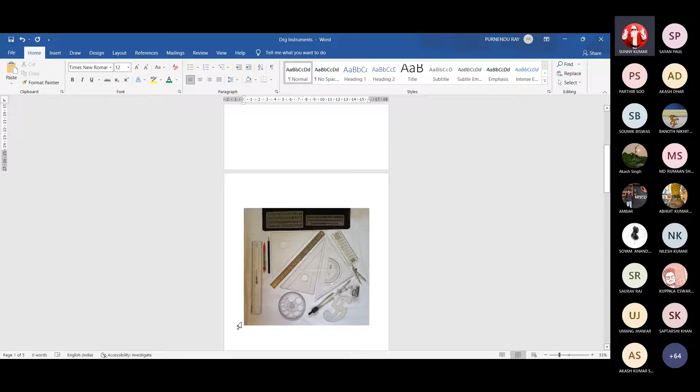Geometrical equipment. This is a scale, plastic ruler. This is another scale, steel. Now these two, I will discuss about these two.

Set square, set square, plastic, transparent. 45 degree, 45 degree, 90 degree, 60 degree, 30 degree, 60, 90 degree.

Now here you find two lines, this one and this one. Ready-made from the market, you will not get set squares with these lines. I made this. You take one permanent marker, place one scale matching the scale edge with the set square edge, and draw a line, suppose 1 inch or something like that.

Then, placing the scale beside these two set squares indicates the size of the set squares. This diagonal length is around 11 inches. Here also it is a little less, or 11 inches. So that is the size you can realize.

Now this is also another set square, 45 degree, 45 degree, but it is something different. There is some linear scale marking in millimeters, centimeters, 18 centimeters, and in millimeters also. And another part is built in.

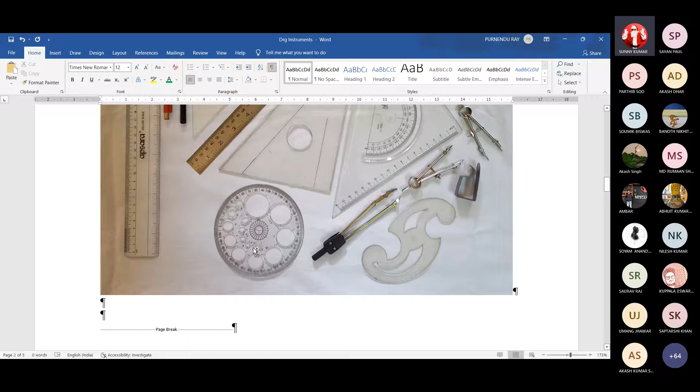Now there are some perforations, holes made bigger, this is the biggest, a little smaller, further smaller, etc. With these we can directly draw circles of their diameter: 4 millimeters, 5, 6, 7, 8, 9, 10, 11, 12.5, and 15 millimeter diameter circles. This saves some time.

You know these two pencils. This is the traditional pencil, and this is... what is the name? Mechanical pencil, lead pencil.

So the thing is, when you use the traditional pencil, you always have to mend this tip. But this mechanical pencil is ready-made with the same diameter, either 0.5 millimeter or 0.7 millimeter tip. Some of us prefer the traditional one, and many of us prefer this mechanical one.

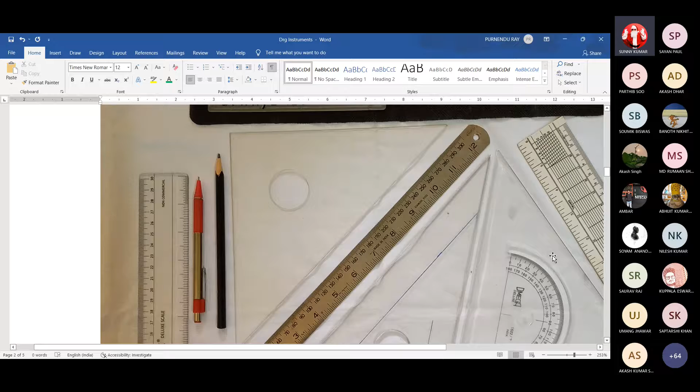Using this type of lettering stencil is very comfortable. This is 10 millimeter height letters and this is 6 millimeter height letters. Simply place the clutch pencil tip within the guide and move along it. This lettering stencil gives very uniform and nice looking letters.

But personally I prefer using only the 10 millimeter size when required, not the smaller dimensions, because it will kill your time. It's very difficult to manage all these things, drawing one letter, then bringing another letter. Suppose it's A, N, D - place A there, then bring N, etc. There are so many such things, and you do it gradually, but it takes time.

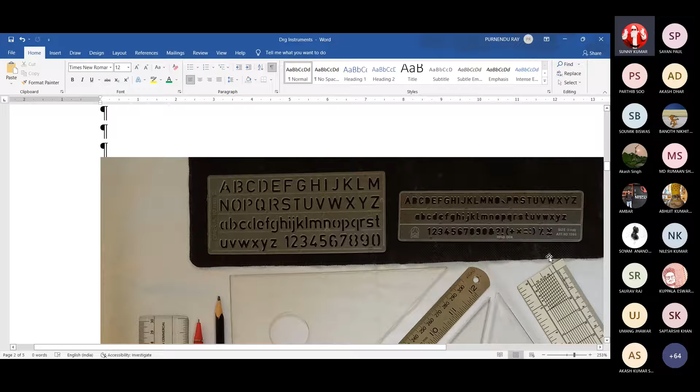So improve your skill of freehand lettering. It will be to your benefit.

Here you find one more thing. Can anybody tell me the name? French curve. This is only one sample; there are many French curves in the total set. This is approximately 6 inches or 5 inches in length, and it may be bigger also, with different styles of curves.

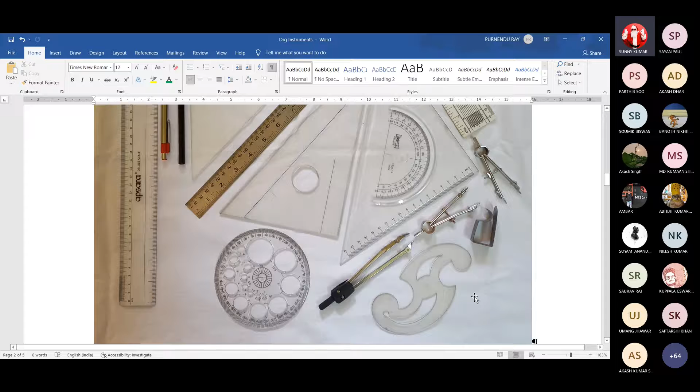If there are 5 or 6 points that need to be connected freehand to represent a graph, simply match the suitable portion of the different curves with those points, place the pencil tip beside the plastic curve, and draw a line in that way.

Now, you know this thing - what is this? This is called a board clip. On the drawing board you place the drawing sheet, and you fix that drawing sheet with this board clip.

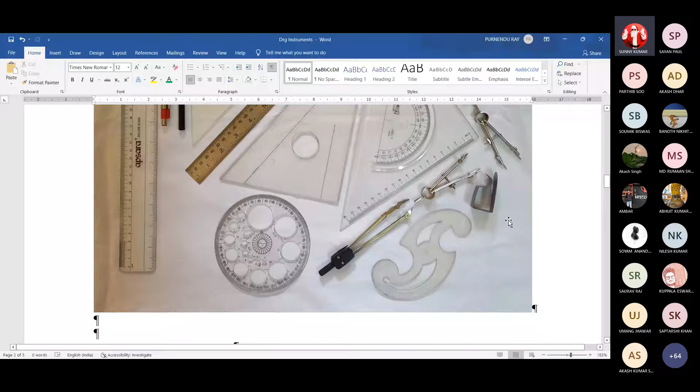Now some 2-3 more things are there. What is this one, the longer one? Divider? No, the longer version is not a divider, it is a compass. This tip is the pencil lead.

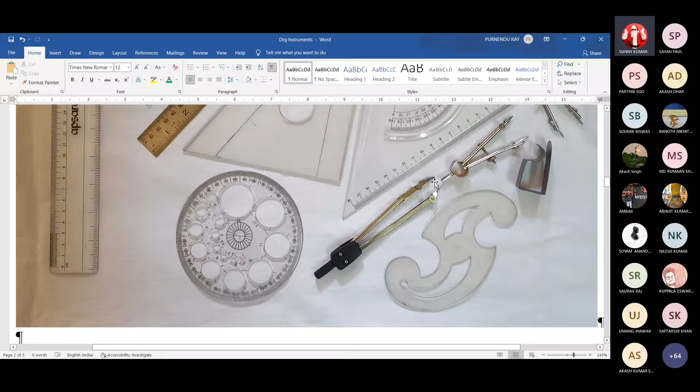Now, the divider is this one, the small divider. A longer version of the divider is also available, though not shown in this figure. This is the divider, with sharp needle ends. And here is the compass, a small compass - this is the center needle, and this is the line drawing pencil tip or lead. These leads are also available separately in the market, not just taken out from inside this pencil.

So now, what about this part? I'll try to make it a little bigger.

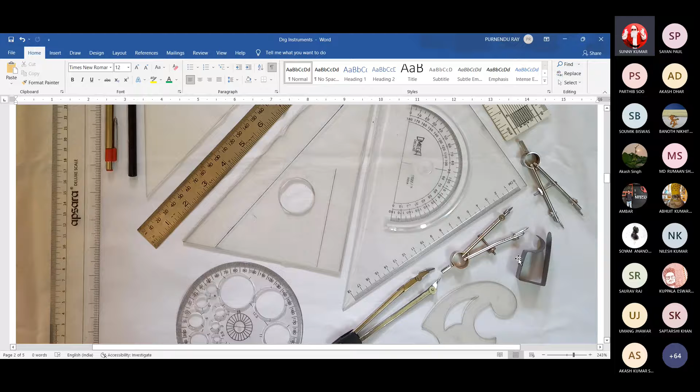This part increases the radius. Fix that. There is a threaded smaller diameter rod-like thing there, and here is some nut, so you can rotate it clockwise or anti-clockwise, giving a bigger or smaller gap, increasing or decreasing the space between these two locations.

That is, between the central needle and this pencil tip. You can make it sharp also for getting a sharp circular line, and for very fine tuning you can use this thing, so you don't need to do the gross adjustment with your hand.

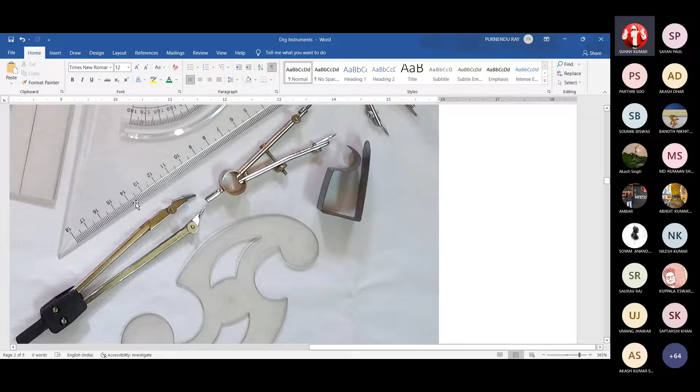Now, how to get the diameter or radius using this thing? We take this needle at some location for any marking, suppose it is 16, hold the other end and stretch it, bring it to match with some reading here, suppose it is 12. So it is 12 to 16, a 4 centimeter radius. And here also that finer adjustment is very easy just using this screw.

Okay, now one more thing you will find there, this one. Is there anybody who can in advance give me that name? Do you have that knowledge? No, this is not a T square.

This is a scale, a diagonal scale. Diagonal scale, diagonal scale, diagonal scale.

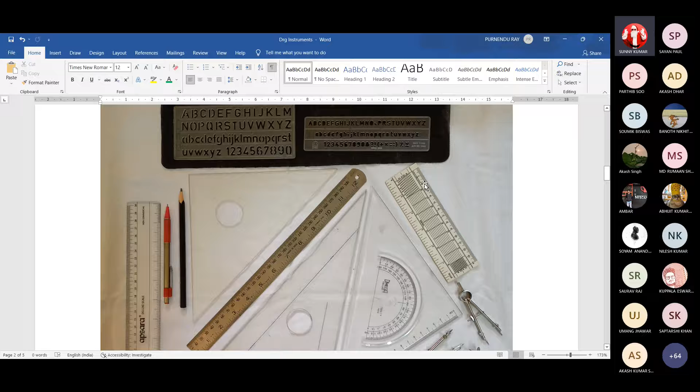Now, meters, diagonal scale, let me try to see this thing. This one. On two sides, sir, above one, this diagonal scale is printed both sides. It's not like a steel or transparent plastic ruler.

It is visible. This is printed on one side, and this is the printed reverse side. This is non-transparent, so for transparent scales, only one side marking will be there.

Now on one side you will find the lower side is inches subdivided in eighths, 1/8 of an inch. So 1/8, 2/8 that is 1/4, 3/8, 4/8 is half, 5/8, 6/8 is 3/4, then 7/8, and this is full 1 inch. Then in that way, 1 and 1/8, 1 and 1/4, 1 and 3/8, 1 and half, etc.

And on the other side, it is inch in tenths, meaning each inch is subdivided into 10 equal parts. So it is 0.1, 0.2, 0.3, 0.4, 0.5, that is a half inch between 1 and 2. This is 0.6, 0.7, 0.8, 0.9, and the full inch.

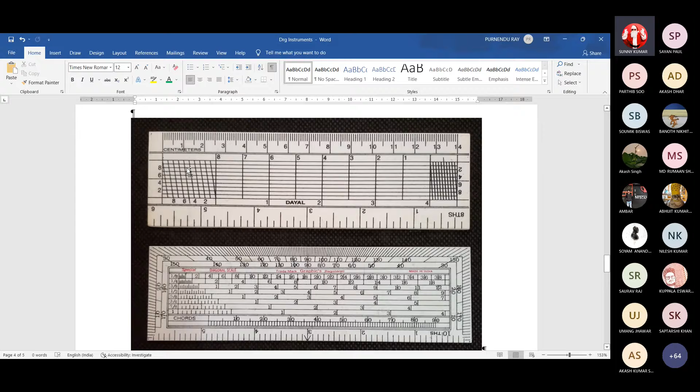Suppose here is a triangle. This is the opposite vertex, and this is the base. Now we draw 9 horizontal lines in between these two extreme horizontal lines. Now we draw a triangle connecting this point to this point, as it is already known.

From these equally spaced parallel lines, what relation can you find? There are 9 such lines: line 1, line 2, line 3, line 4, line 5, line 6, line 7, line 8, line 9. Now what about these smaller subdivisions? If this is one unit, then what about this length, this length, this length, etc.?

They are in the ratio of, suppose this height is to this base.

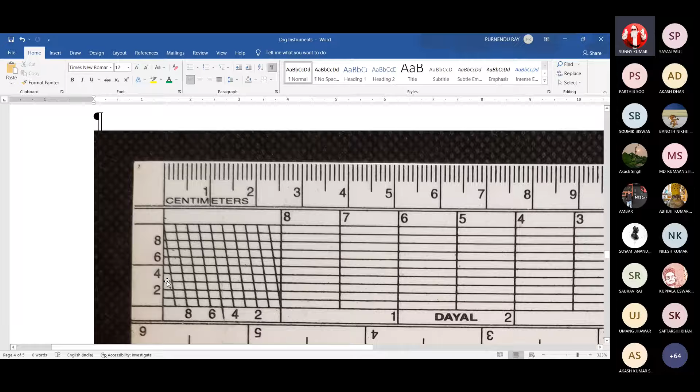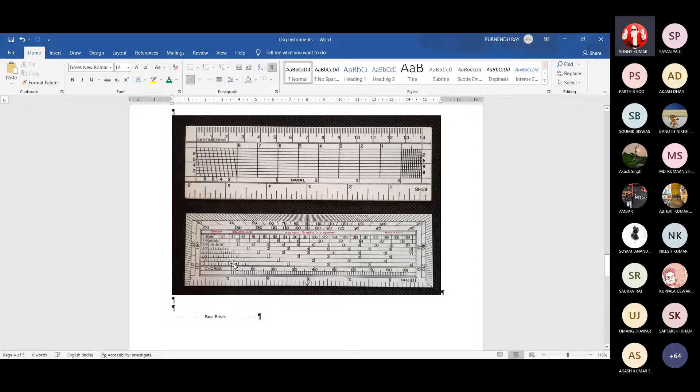We'll discuss in detail when time comes, but so far regarding the diagonal scale, some primary things you should know now. And some chords are also there, scales of chords. So many interesting things are there.

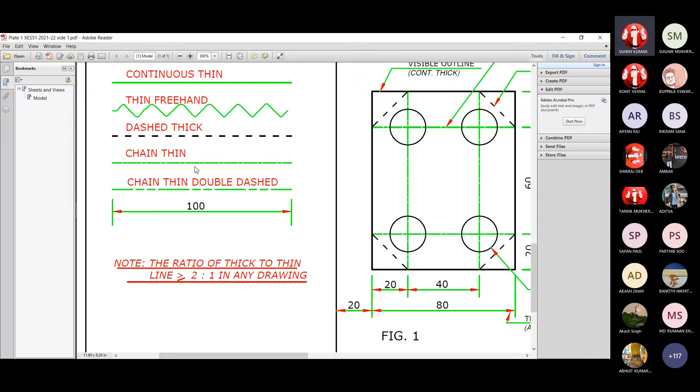Okay, now I will make everything enlarged or bigger for your convenience, but right now you concentrate on the whole page as such. So for instruction, draw border line on each side of each drawing sheet for every plate.

The roll number must be written in ink in the nameplate and title block.

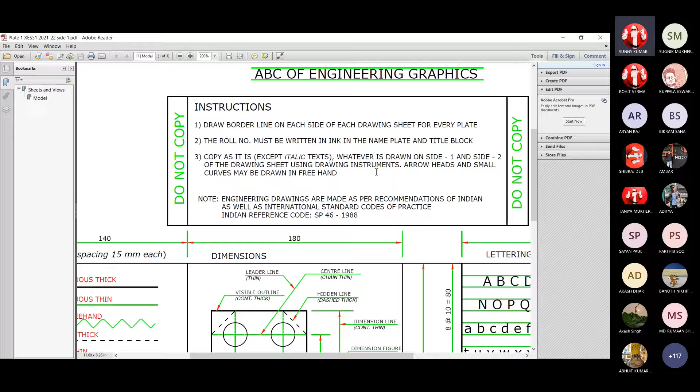Whatever is drawn on side 1 and side 2 of the drawing sheet using drawing instruments. Now arrowheads and small curves may be drawn in freehand.

These small triangles at the end of the line, these red triangles, these are called arrowheads. Okay, now these arrowheads and small curves, like this one is small curves, or some other location you will find some curves. You don't need to use any instruments.

Okay, now one note is there, engineering drawings or engineering graphics, the other name, are made as per recommendations of Indian as well as international standard.

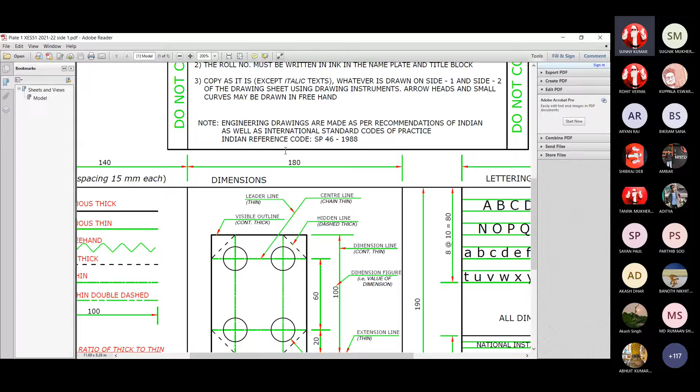I don't know whether there's a facility for getting this online, but we have taken our membership for BIS, and we have lots of code books there, special publications of codes also for these things. So please go through, provide some time for this purpose.

Next thing, so this is done, copy everything except italic text. Now first thing what we do is draw the border line.

Next, do not copy this thing, meaning you do not do anything here. Only thing here, you write this heading of this plate. This is plate number 1, ABC of engineering graphics.

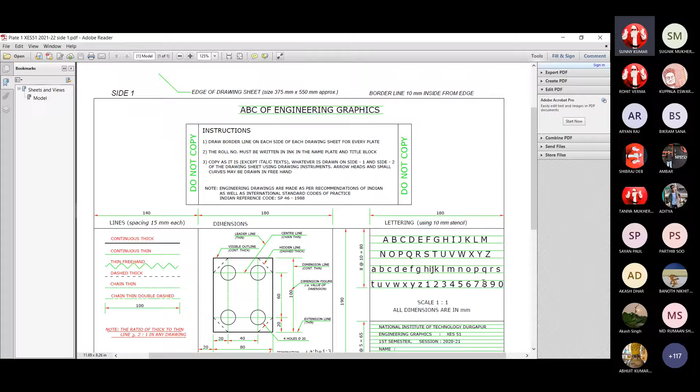So after drawing this borderline rectangle, what we do, in its right and bottom corner, we make this rectangle with some very thin lines. Those should not be very prominent, only some guideline.

And write this thing: National Institute of Technology, Durgapur, Engineering Graphics, XES 51, first semester, session 2021-22, name - your name, roll number - your roll number, section - your section, plate number 1, and date of commencement of that.

It is the normal formality, but for this pandemic situation, I'll tell you what to do, because this drawing sheet, the board, drafter, etc., many of you cannot avail, or anyway, it's not easy to get all these things.

A drafter might come, but you need to manage the drawing board as such, I cannot force you. Whatever is common for everybody, that much I can think of.

Now all these gaps are 5 mm. 13 such gaps are there, these thin horizontal lines where you need to accommodate these letters and words. All these things are freehand writing, in pencil.

Only thing here, the roll number, just beside the roll number you write 21H8001, 21I8001 in that way, with ink.

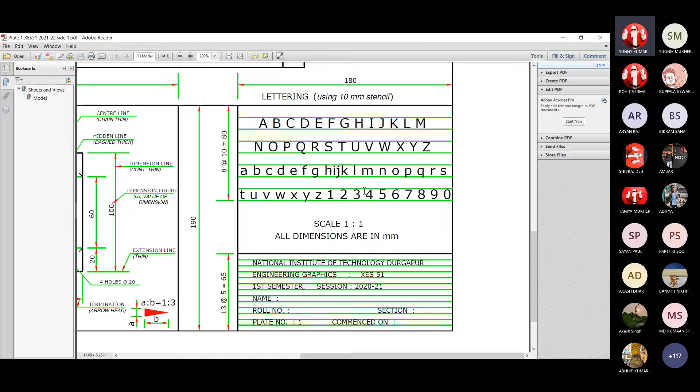Now, first we subdivide these into different blocks. How to make different sizes? First of all, from the bottom border line, we leave a gap of 190.

Can you read this figure where my cursor is moving? Yes sir, 190 millimeter. At 190 millimeter gap, you draw a line parallel to this bottom border line.

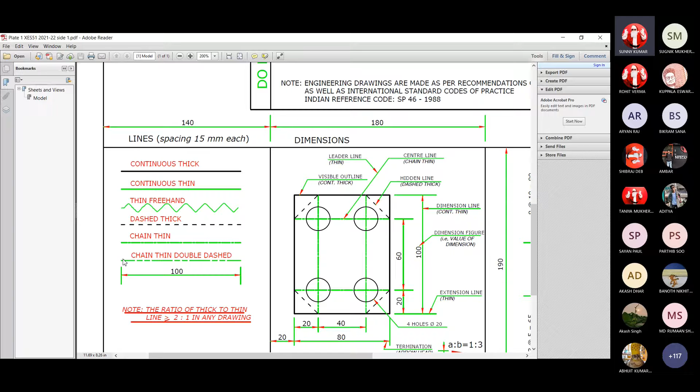Here it is a chain line but thin. Now chain thin means it is most likely not properly visible here, I will make it a little bigger. So: a long dash, a small gap, a short dash, a gap, a long gap, short dash, gap, etc.

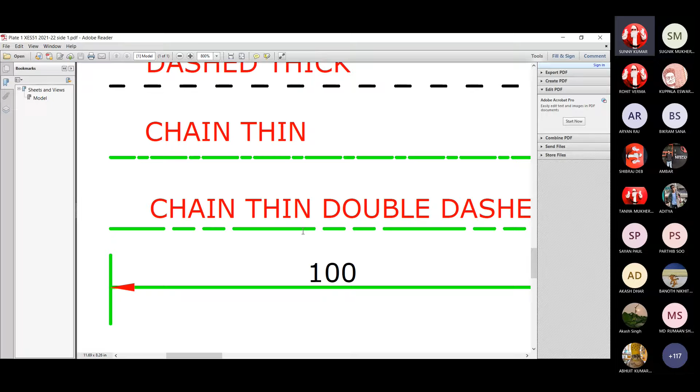This type of lines are called chain lines, and when you draw it thin, it is chain thin line. It could be chain thick also. Now it is chain thin double dashed: one long dash, one gap, one short dash, gap, another short dash, gap, then again that long dash. So it is chain thin double dashed, and length of each line would be 100 millimeters.

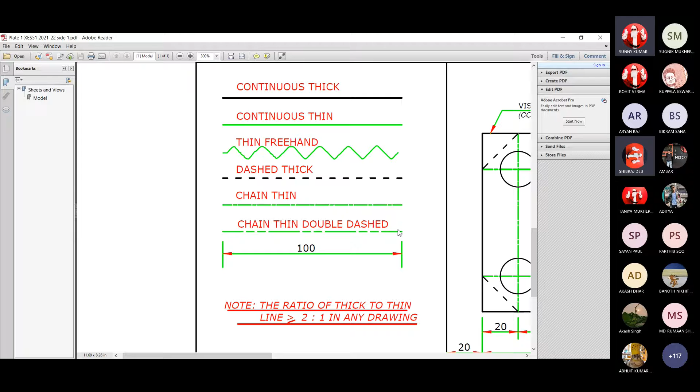Yes sir, next thing, this is the first left hand side box. You come to this second box. One doubt is there, sir. How to draw thick and thin line in ratio 2:1?

Like freehand, how can we have that idea? Like this is thick and this is thin. Suppose I have shown you that pencil, how do you mend your pencil, with blade or knife? Sir, with sharpener.

Now, when we use sharpener, you make that tip very fine. But if you do not use that sharpener, think about a new pencil, just brought from the shop, and you start mending it with blade. Normally blade gives a little difficulty for our fingers, or use a very sharp knife, and cut that wooden portion in such a way that the inside lead part is intact. So you can do it. Using your sharp knife or blade, you can make the tip diameter either fine tip or some blunt head. So we can do all such things just to change the thickness of the line.

It is very interesting. Now, I mentioned about two books, one is N.D. Bhatt, other is K. Venugopal, and there are many other books. You can go for anything freely downloadable, but if you can purchase, it is a very good utility book for engineers. In earlier days, we used to say drawing is the language of engineers.

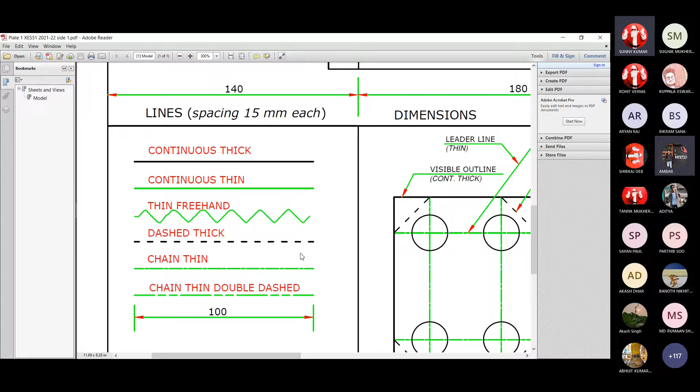So these correspond to different lines. These will be used, and here you find the length of these lines is 100 millimeters. Now, how do you understand that this 100 is in millimeter? Can I say it is 100 centimeter? No sir. That 1 meter length cannot accommodate in that 550 or 55 centimeter long drawing sheet. Whenever any unit is not mentioned in this drawing practical class, then automatically all dimensions are in millimeter.

Pakka? Next thing, the length between this location to this location is normally indicated by this type of system. These two lines at the end are called extension lines. This line is called the dimension line. The red arrowheads, distinguished by their red color, these are called termination arrowheads. This is the dimension figure.

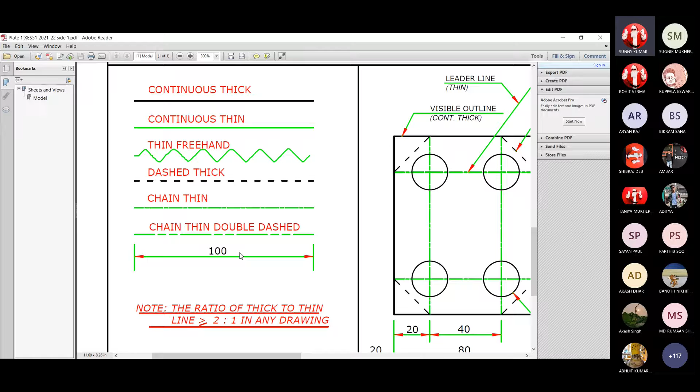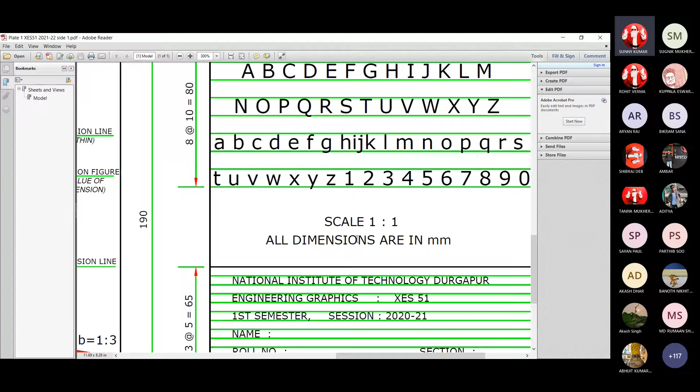If any unit we are using, we will write it. Otherwise, we will do one thing at one suitable location - in this case, just above this title block - write 'all dimensions are in millimeter'. Wherever you find this dimension value, its unit is millimeter. Another thing is their scale 1:1. We will see this later. Now just remember this formality, scale 1:1.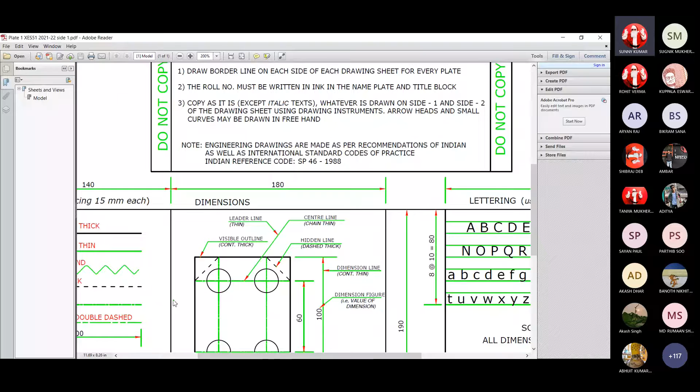Next thing, we make it little bigger, the middle box. The heading of this box is dimensions. Now dimensions of different lines, different objects, etc. are given in this way. Now let me describe about this. Can you please give me 1 minute? Yes sir.

Now, can you see this shared page? No sir, no sir, no sir. Sir? No, not visible sir. No sir. Just hold a minute, I'm trying to reconnect it.

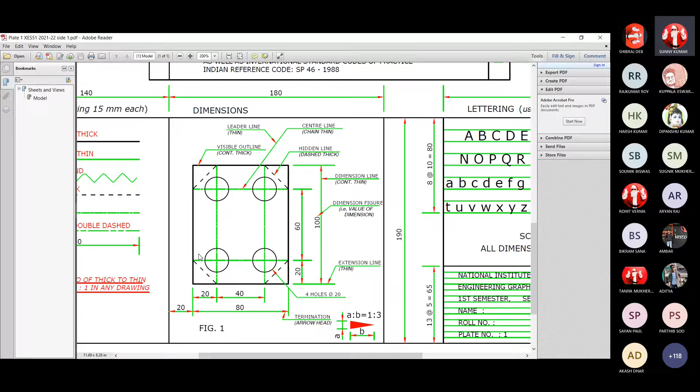So sir, we can see a black line rectangle, then in corners there are dashed lines. Here is a dash line, here is also a dash line, in all these four corners. Now, very close to these corners there are four circles, 1, 2, 3, 4. And passing through the centers of the circles, here is one more thing. I will make it a little bigger, you will find this.

These chain lines, one long dash, short dash, etc., with a gap in between them. Next thing, identifying all such things. Suppose we think about this as a metal plate, a rectangular metal plate, and four holes have been made, and some portion is there. From bottom, it has been made into some thinner line or something like a thinner portion.

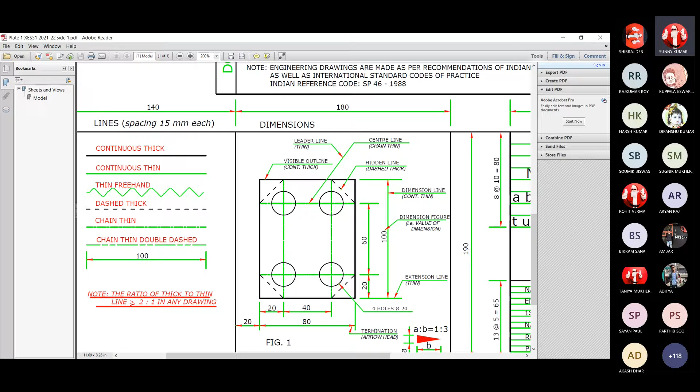Anyway, this is the object, and we give its description. Now this black line is identified by visible outline. You have to write these words 'visible outline' without writing 'continuous thick', because that is in italic. We draw one line, we draw another line, we touch this line with visible outline and put one arrowhead there. Okay, this is the visible outline.

Now these lines passing through the centers of these circles are called center line, whose description is chain thin, but you need not copy these words chain thin. It will be understood automatically by this type of line, it is a chain thin line.

Now these type of dashed lines are called hidden line. Description is dash thick. Don't copy these words dash thick, and indicate this line in that same fashion. A line, one inclined line pointing towards this dash thick or hidden line, and put the arrowhead as shown with the red isosceles triangle.

Next, this line is called leader line. To identify one object or line, etc., we identify it this way. Draw this leader line and point it towards its description, like center line. And this is a thin line, thin continuous, which is called leader line.

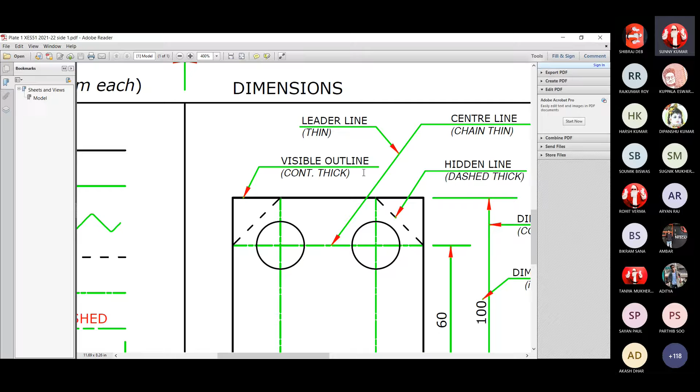Now at different locations, different objects are there. These are the circles. So if it is a plate and four holes have been made, then description of these holes is given this way. The leader line, the termination arrowhead, you mention number 4, that in this plate there are 4 such holes, so you don't need to put the description for all 4 circles. Only this information is sufficient: 4 holes. Now there is one symbol.

Now what about the name of this symbol? Phi. In engineering drawing, this phi is used to represent what? Diameter. Okay, so 4 holes of diameter 20. 20 means 20 millimeter.

Millimeter. Now these are the length dimension from the center of this circle to the center of this circle. The gap is 40 millimeter. This line is extension line, this line is extension line, this is the dimension line, this is dimension line, arrowhead termination, this is the dimension figure. Without unit means some unit has been specified at some common place, that all dimensions are in millimeter. So this is in millimeter, that is 40 millimeter.

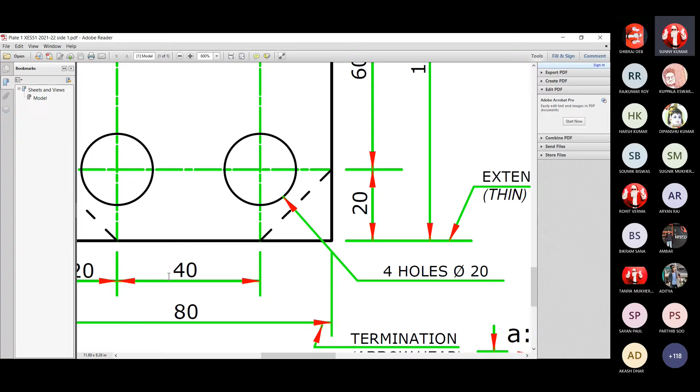Other thing, the name of this figure is given in this form, FIG.1, figure 1. Now termination arrowhead is something like this. Isosceles triangle, if it is A and if it is B, then approximately this ratio A is to B equals 1:3, and you don't need to bother about that.

You do some good practice so that freehand ability is improved, and you can draw these very simple isosceles triangles, but this base should be 1/3 of this height. Only practice will make you almost perfect. Next thing, dimension figure, that is the value of dimension here. Dimension line, this continuous thin line, this one, this line is called extension line, as I have explained already.

So this part will give you the dimensioning. So from this edge to this edge of the plate, what about the length? For that, we give a small gap and draw a thin line after that. This is one extension line. This is another extension line.

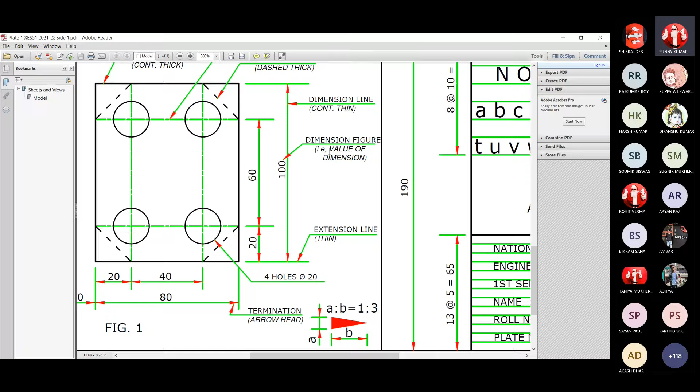Okay, and this is the dimension figure, that is the value of dimension. Now this thing you don't need to copy, that is 'value of dimension', it is in italic. Only thing, this part is dimension figure. So is there any confusion or question about this? No sir. Okay, the third box we have already discussed about that, so you have to simply copy it. Okay, then...

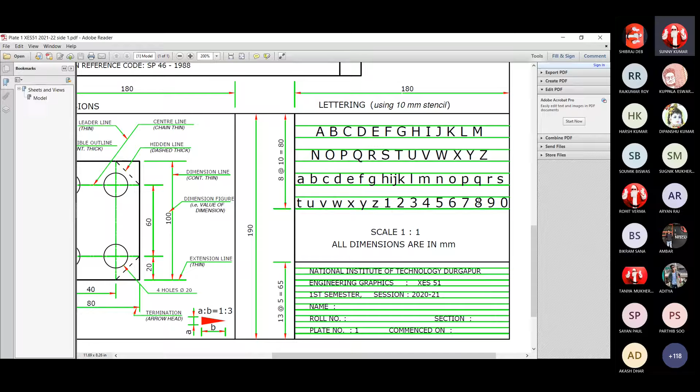About side 2 of this plate. Let me come out of this.

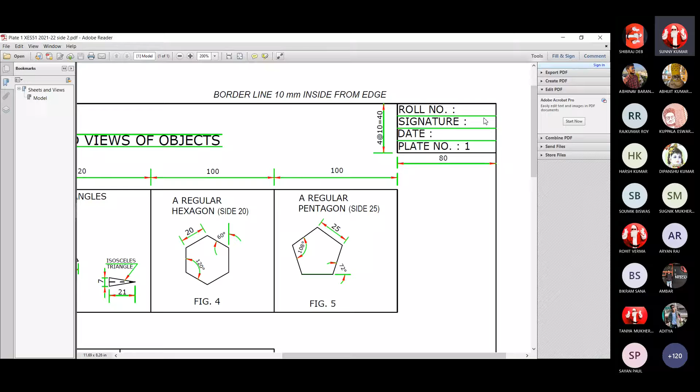Okay, now see the overall shape of this side 2. Different things are drawn or written here, but their positions or coordinates are fixed. One thing, the heading of this side 2, that is geometrical figures and views of objects.

Now, where that line should be there, of two 10 millimeter gap parallel lines, 25 millimeter from top border line, you draw a line horizontal very thin, give a 10 millimeter gap from that, and below it you draw another thin horizontal line. And where from you start writing these geometrical figures and views of objects, this heading, at a distance of 50 millimeter from this left border line.

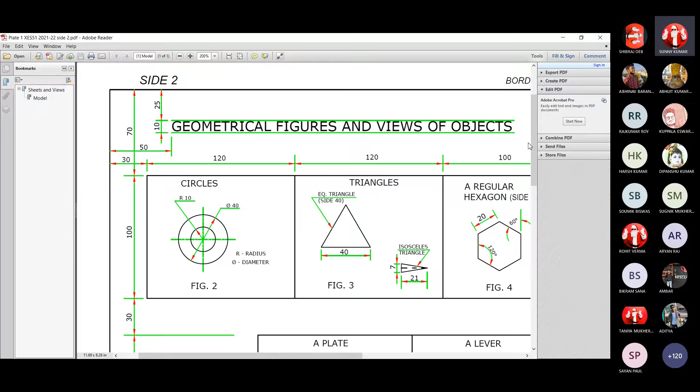So first, below 25 and 35 millimeters from top edge, you draw two horizontal very thin guidelines. Then you start writing GEOME etc., starting from this location, which is at a distance of 50 millimeter. Once you write this headline or heading of this plate, then you come here.

At a distance of 70 millimeter from top and at a gap of 30 millimeter from left border line, we form a big rectangle with 4 partitions or 4 compartments, and partition lines are 120 millimeter from this line, again 120 millimeter from this partition line, again 100 millimeter from this partition line, and one more that is 100 millimeter. So in that way you complete this partition.

And below that you make a big rectangle with partition in 2 compartments. Now at a gap of 30 millimeter downward, you draw a rectangle of 250 millimeter length and 120 millimeter height, and at the middle 125 by 125 you draw a partition line. Now you are ready to place different objects using the drawings in these 6 compartments.

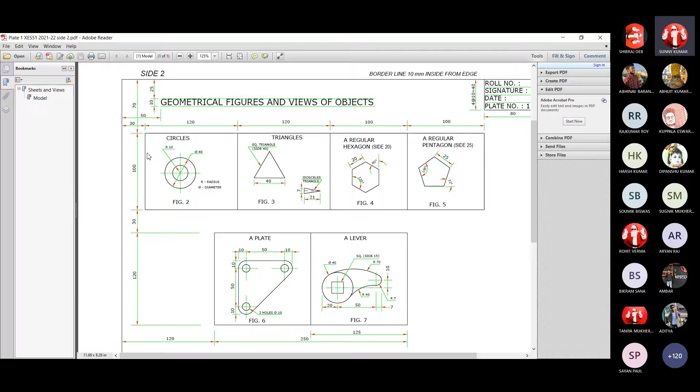So in this first box, there is one drawing, figure 2. Okay, and it is in this way. Somewhere near the central location, you select a point, and there you draw 2 circles.

What about the dimensions of these circles? This is diameter 40, the outer one. This symbol indicates the diameter, and R indicates radius. So the smaller one is radius 10, that means 20 millimeter diameter, and 40 millimeter for the outer.

But dimension style is different. Here, this is starting from the center, pointing towards the periphery. There you put one arrowhead.

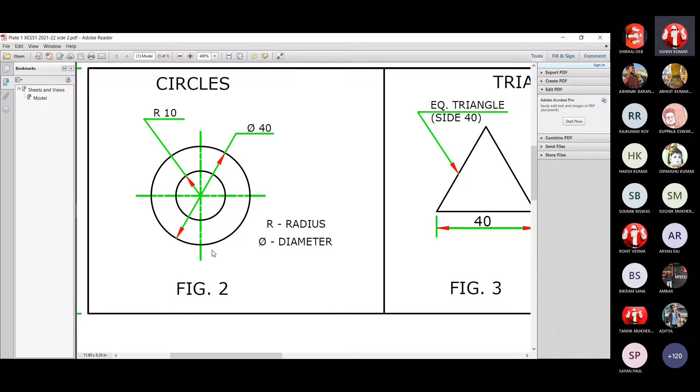Okay, now move to the third figure. This is corresponding to triangles. What about this triangle? Its description is equilateral triangle. This is the leader line, and this is the termination arrowhead. Its side is 40 millimeter in this way. And this 7 by 21, it is some kind of arrowhead type thing.

Isosceles triangle with ratio 1:3. Sir, will the triangle be drawn with a thick line or thin line? The thick line, all thick line. All object border lines, rather the main object's outside boundary lines, must be thick.

And these are the helping lines to describe this object; they must be thin. But this color is used for identification, or rather for my comfort in describing this thing. Otherwise, in pencil, there is no color - everything is gray.

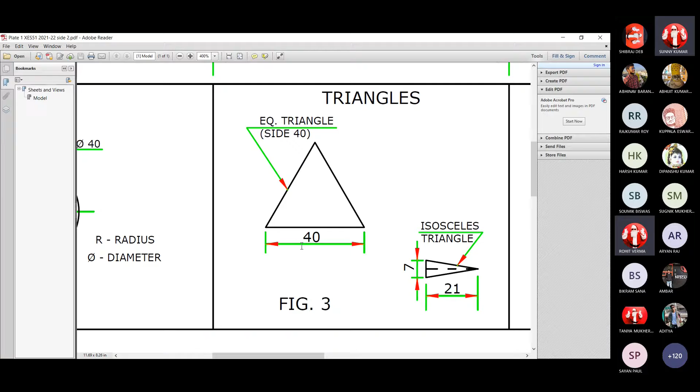Now in this third box, here is one object, a regular hexagon, side 20 millimeter. So you draw this hexagon of side 20 millimeter and describe it in this way. Internal angle is 120 degree.

Here is one arc, and at the end of this arc there is a termination arrowhead, side extension lines, dimension line, dimension arrowheads, dimension figure, and the dimension unit is already mentioned at one corner - all dimensions in millimeter. And this is the external angle, 60 degree. This is angular dimension from outside, and this is angular dimension inside.

So whenever there is a very small angle and it is very difficult to accommodate these arrowheads, then we proceed from outside.

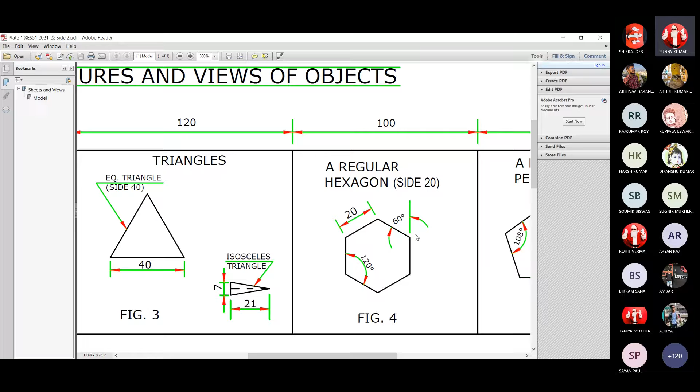So these formalities are some kind of like knowing ABCD, etc., and formation of words, formation of sentences, and then ultimately the whole subject - it is engineering drawing or engineering graphics, whatever name we use.

Next thing, another simple figure, a regular pentagon, side 25. Now for the pentagon, this angle is 72 degree, or internal angle is 108 degree. With geometrical instruments you can draw this, but normally with pencil, compass, etc., with the scale. But here you need to use a protractor for either 72 degree or 108 degree.

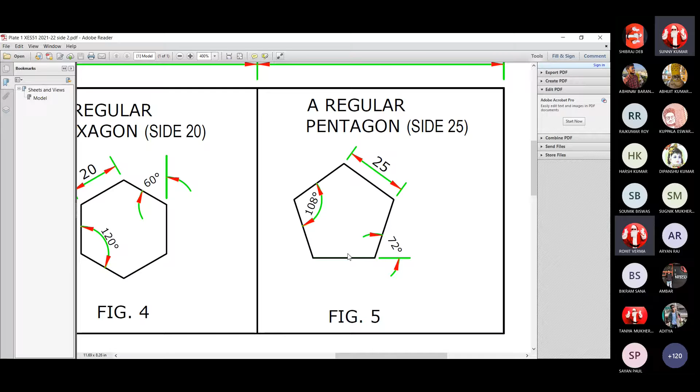Okay, and as you use the drawing instruments, you will become confident about doing all such things. And it really needs practice.

Now in figure 6, this object is a plate. This black thick outside line is that plate, which has 3 holes at 3 locations. This is identified by '3 holes phi 10', that means 10 millimeter diameter. And what about the size of this plate?

From this point to this end, it is 50 plus 10 plus 10. From this end to this side, it is 50 plus 10 plus 10. Now what about these corners? These corners are circular lines.

Okay, now what actually it is. We start from these 3 central locations for 3 circles. We identify one location here. Towards the right, identify at a distance of 50 millimeter. From this point, come down by a distance of 50 millimeter. Now there you draw a circle of 10 millimeter diameter, 10 millimeter diameter, 10 millimeter diameter.

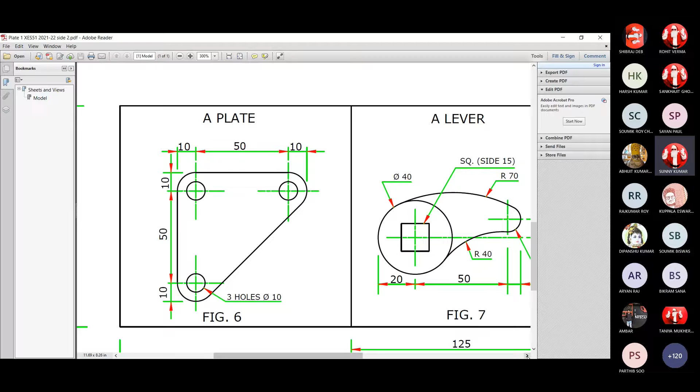There is a circle of diameter 40. Inside that circle, at a central location, there is a square of side 15. All these things are identified or described by this termination arrowhead, the leader line, this extended leader line, and its name, etc. So the final object lines must be dark and thick.

Now, here is a part circle whose center is at this location, at a distance of 50 millimeter from this center towards right, and at a distance of 10 millimeter above this center line.

Here you draw one circle with a very thin line which is incomplete. Then you draw two circular arcs. One is this one of radius 70, another is this one of radius 40, so that they touch this bigger circle and the smaller circle, accommodating inside. This radius 40 arc touches this bigger circle and this smaller circle from outside.

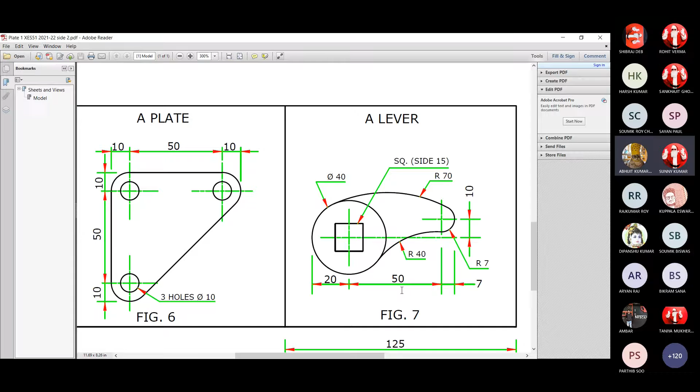Sir, while drawing the 70 millimeter and 40 millimeter circular arc, what should be the center of the compass? Where will we place the center?

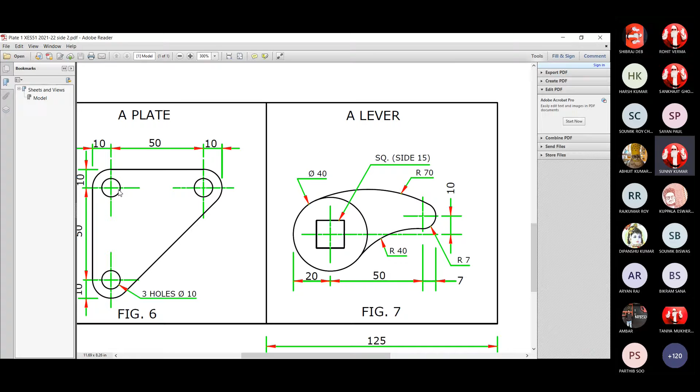So this was all about side 2. This is outside the border line, so you don't need to describe this borderline. Of course, it is given in italic also, and this is the name of the side, side 2.

That is also written in italic. You don't need to copy this thing. Everything inside this box, this borderline rectangle, you do it. And if anything is there in italic, don't copy it.

So what about the position of the figures inside the compartments? That is arbitrary, but it should not be just shifted eccentrically. It is very much close to this edge. It depends on your common sense.

Now, what about the length of this object? 70 millimeter maximum width. Then for putting the dimensions etc., you need 5 or 10 millimeter more. So if it is 5 plus 5, 10 plus 70, that's 80.

So you accommodate 80 millimeter within this 125 millimeter. So the left out portion is 45. So leave around 20 millimeter on one side and 25 millimeter on the other side. So you can start with this location.

At a distance of 25 millimeter, you draw this vertical line, and then onward you start completing this portion, then circles, then the center lines, then extension line, dimension arrowhead, dimension figures, the title of this figure, and the figure number 6.

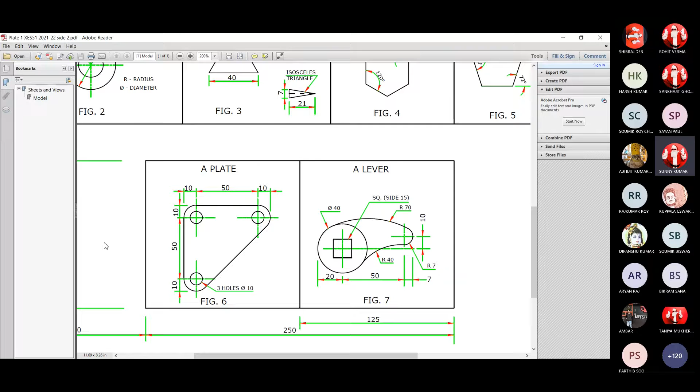Where to start this corner? That is 70 millimeter below the top border line and 30 millimeter towards right from the left border line. That's all. You start from this corner of this big rectangle. These are the compartments with these partition lines. Similarly here also it is rigid, and you have to place this thing centrally or symmetrically.

Sir, where do we have to put the unit? Is this the first sheet? On the other side, it is written just above this title block: all dimensions in millimeter.

And that is true for side 1 as well as side 2. That is for plate 1, and for all plates it will be like that, right side bottom. Right side bottom corner, there is a title block, and above the title block it is written.

But in this plate, sir, somehow these two pages are not in a single PDF file, so I have that difficulty with continuity of the page. Anyway, I cannot come back to that directly. Page 1, I need to unshare this and then share afresh the other side, side 1.

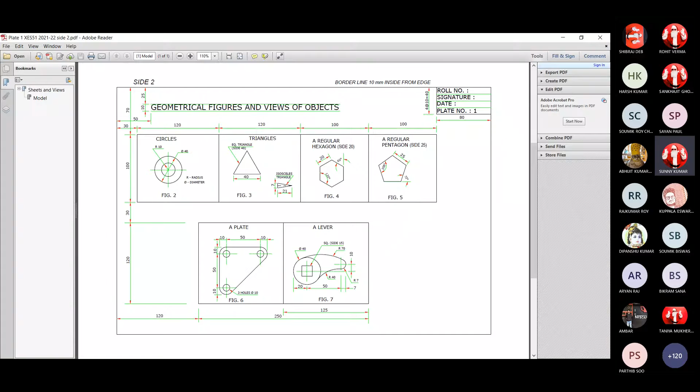All these things, whatever is there, it is all about plate number 1. Then in continuation to that, I will discuss some more things.

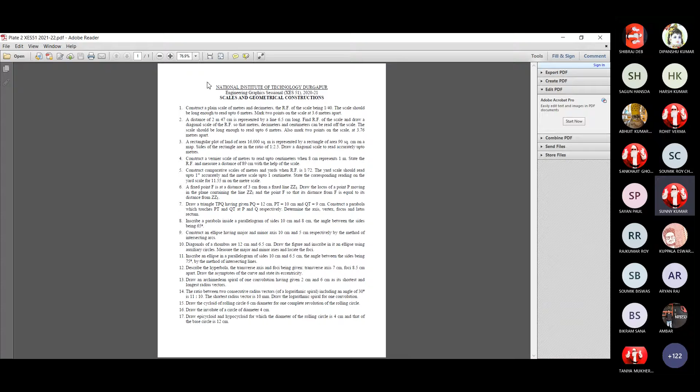Do you get any fresh page? Only text matters are there. Fresh page, sir. Now, some small correction is required there. I have used the last year's plate number 2. It should be 21, 22. Things are the same, nothing has been changed or modified.

National Institute of Technology, Durgapur, Engineering Graphics Sessional XES 51, 2021-22. The title of this plate or topic of this plate is scales and geometrical constructions.

Now you'll find some questions are there and you have to answer. Answering means not in the form of calculation, writing pages after pages, not in that way. It will be there in the form of some drawing. Now can anybody read out the first question?

Construct a plain scale of meters and R.F. of the scale being 1/40. The scale should be long enough to read up to 6 meters. Mark 2 points on the scale at 3.6 meters apart. So this thing is the question.

You have to make the solution in the form of a drawing. For that...

I'll give you that lecture, and that will not be sufficient. I will ask you to rather study personally some more things. Books are always the good knowledge bank, you know. So you consult any book. Most of the books discuss in almost identical manner, so nothing to worry.

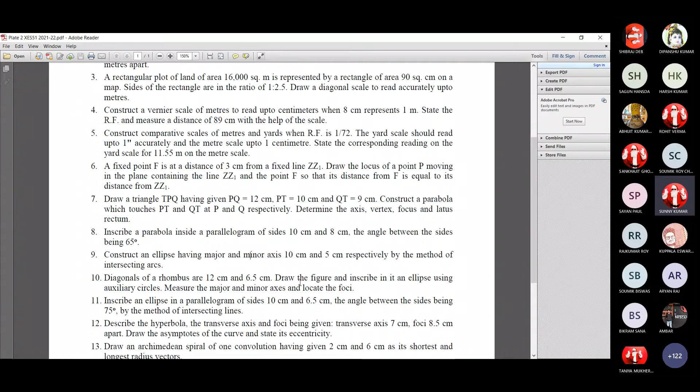So problem 6 is a parabola, problem 7 is a parabola inside a triangle, problem 8 is a parabola inside a parallelogram, and then problem 9 is construction of an ellipse.

All these geometrical constructions are very interesting and approached differently. Now construct an ellipse having major axis and minor axis of 10 centimeter and 5 centimeter respectively.

By the method of intersecting arcs, I'm not talking about intersecting arcs right now. I just ask you, what is your idea to draw an ellipse, or which principle, logic, rule or norm would you use, when the major axis length and minor axis length are given?

Sir, once again repeat the question. If we have to draw using the same distance from both sides.

Okay, forget that for now, try to recall something from your school days. Is there any such almost identical norm like parabola, a locus of a point which keeps the distances from a fixed point and a fixed line the same?

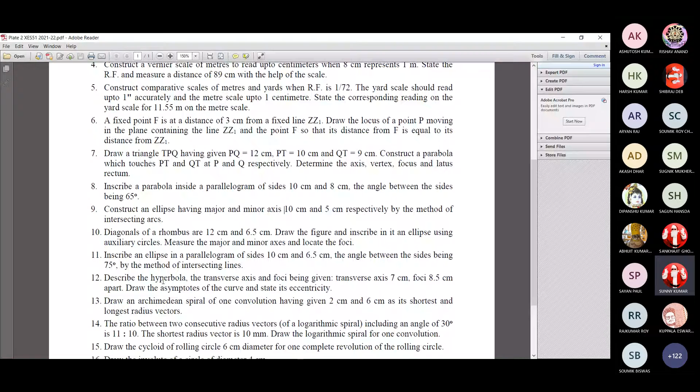Now mathematically we prove it, but geometrically, it was a very old thing to understand all such things. Next thing, hyperbola. That is also another type of curve. So ellipse, parabola, hyperbola, etc. After problem 12, 13, 14, 15, 16, 17, there are such names — one is Archimedean spiral.

Next thing in 14, logarithmic spiral. 15th one is cycloid. 16th one is involute, and 17th one is epicycloid.

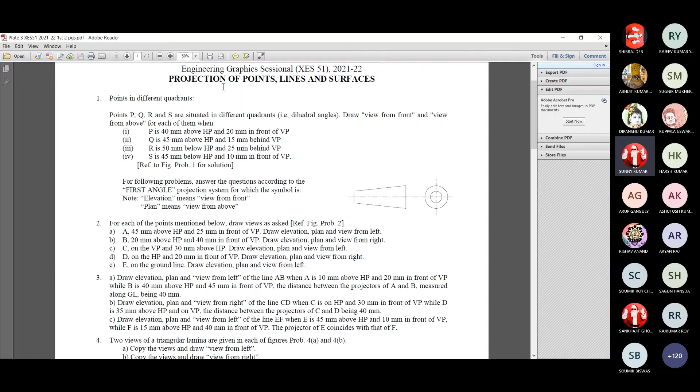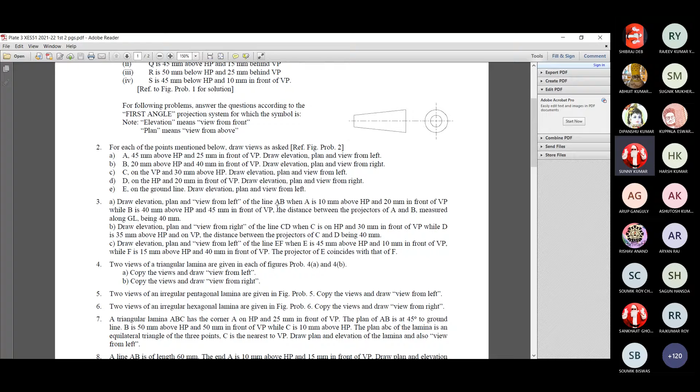Now, projection of points, problem 1, problem 2, problem 3. Here it is line AB. Then here it is a surface, a triangular plate, sometimes called a lamina.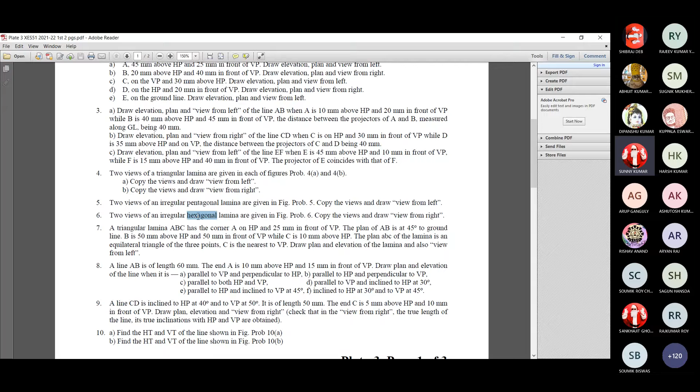Now, another geometrical shape, a pentagonal plate, then a hexagonal plate. So many such things are there. And there you will find one more important thing.

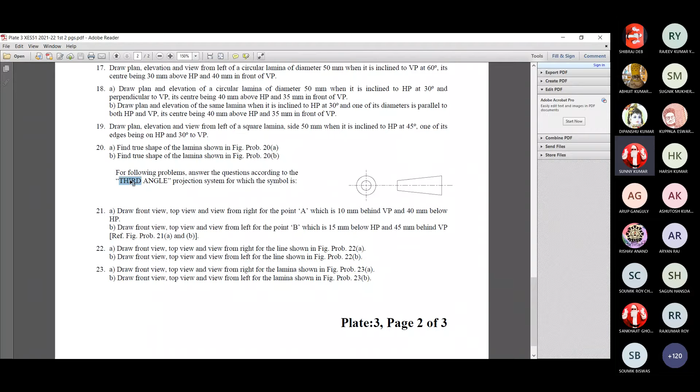One thing is here, this third angle, and another we got it at the very beginning, this one, first angle. So first angle, third angle, and different dihedral angles corresponding to this.

And some solutions for 1 or 2 problems are given there, and some diagrams are given that will come in our page number 3. Really, I cannot describe this thing without discussion of this chapter, and it will be really impossible for anybody to understand, though it was possible to describe in some manner these geometrical constructions, the scales, etc. But it is not possible here.

So this was plate number 3. Plate number 3 has got one more page.

Other things are descriptions for some problems, or some additional figures are given. We have to follow the instructions and draw the projections. But right now, really, I cannot communicate anything about this thing.

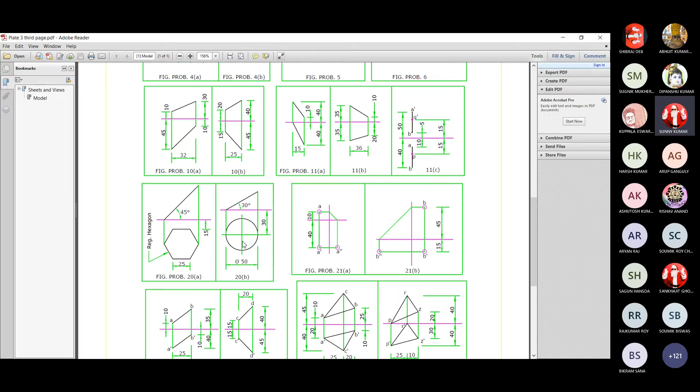Next thing, this was corresponding to plate number 3. Now plate number 4, here it is.

Now that same projection, here it is, projection not for points, lines, or surfaces, but for solids.

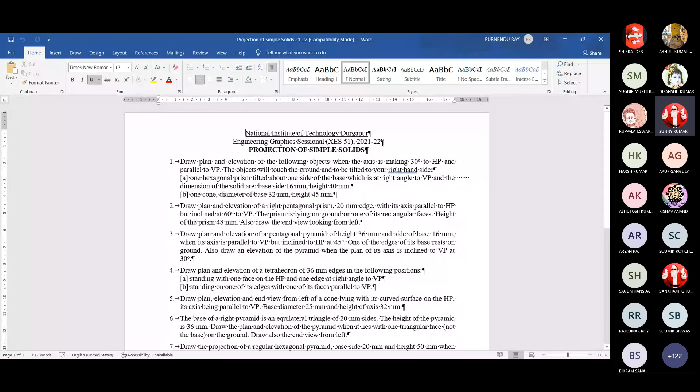Projection of simple solids. How many such problems are there? 12 problems. Here you will find some words.

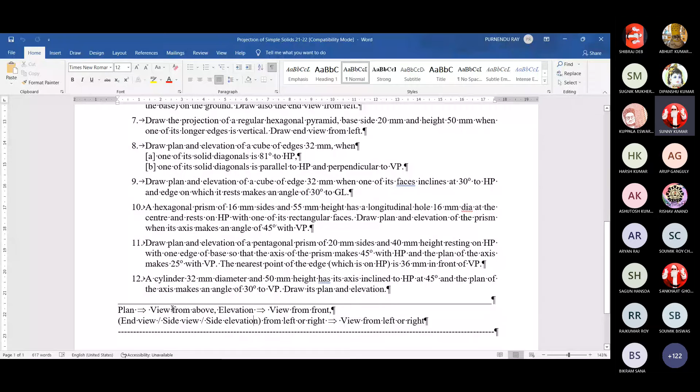Have you heard these words? Plan, elevation? Yes sir. Plan normally comes for building plans etc., and elevation is looking at a building from one location - side elevation or front elevation etc. We will learn this in plate number 3 first, then apply it to these objects also, simple solids. After simple solids, we will know this thing.

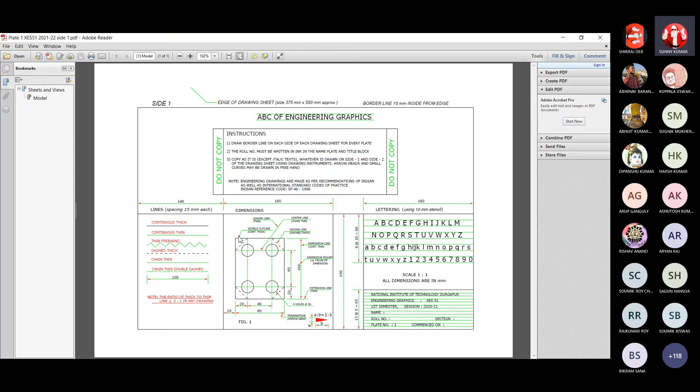Practice this thing, how to draw these arrowheads more and more accurately etc., and maintain this ratio of 1:3. It will take time. So do all this practice, and whatever is required for us, we will do accordingly. Okay, and of course you must go through books also.

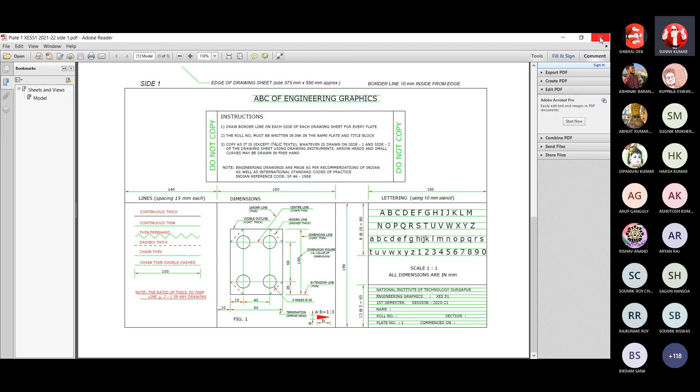Okay, I am going for the second page. Second page is here. This is the second page. Now you take another screenshot.

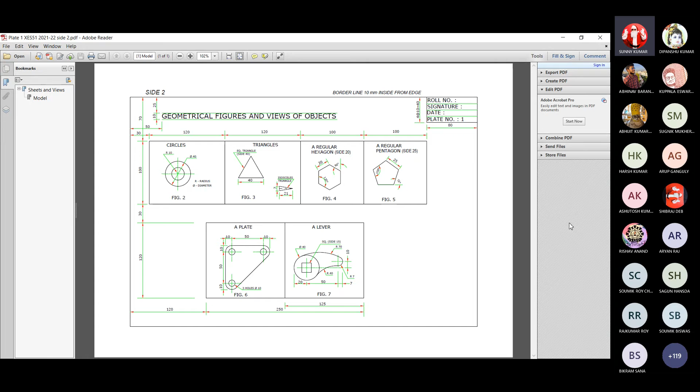Maybe most of it will be a little hazy, not clear, but still at least you can have some idea, because we already discussed all these things individually. Yes sir, but the lines, that gap is not properly visible sir. It's okay, it gets cropped fully, that is not a big issue. I'll send you these PDFs, but before that, at least you can spend your time with this thing.

So your school day geometry box is there, you can take help from that also, even if you cannot purchase the big compass, the big set squares etc.